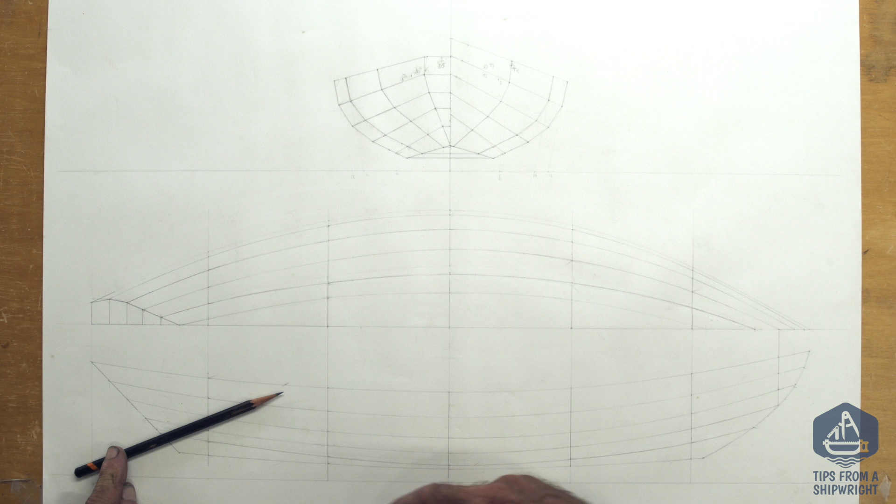Not only is it not over the lee side, because most of these boats sailed way better if you used an oar over the lee side, but it's a little tricky to reach it because you're trying to be on the windward side. So even though it sailed well, you got your weight in the wrong spot. So this oar right here, or this rudder, the tiller, is going to be amidships when you sail it, right in the middle of the boat.

It's going to be very easy to reach it, it's going to be easy to use it for some other purpose. You don't really have to stow it or put it away like you would a normal rudder. So it's a really nice feature, I think, right there.

It's also going to have in the boat a little well in it right here, just ahead of that right there. And that little well is going to be so that you can put a little tiny outboard motor or possibly an electric drive in it right in here. And your rowing seat is going to be up in here like this. So you got plenty of room between the rowing seat and your little outboard well like that. And like I said, when you want to row the boat, you just pull the oar out, you use it as one of the oars to row the boat with.

And then it's actually going to have another rowing seat up forward up here, and then a little dagger board trunk just after that seat. And it's going to have like an articulating dagger board in that well right there. So that's going to make the boat sail considerably better than it would.

It's going to have a very simple rig in it, and it's going to be actually stayed. I don't like the idea of putting an unstayed rig in a boat like this because I don't think they're structurally capable of holding one properly, you know. So what I do is I'm going to have a shrouded rig. It's going to have 2 shrouds and then a little head stay, and the whole rig comes down at once and rolls itself up, and you can stow it. So it's going to be pretty nice.

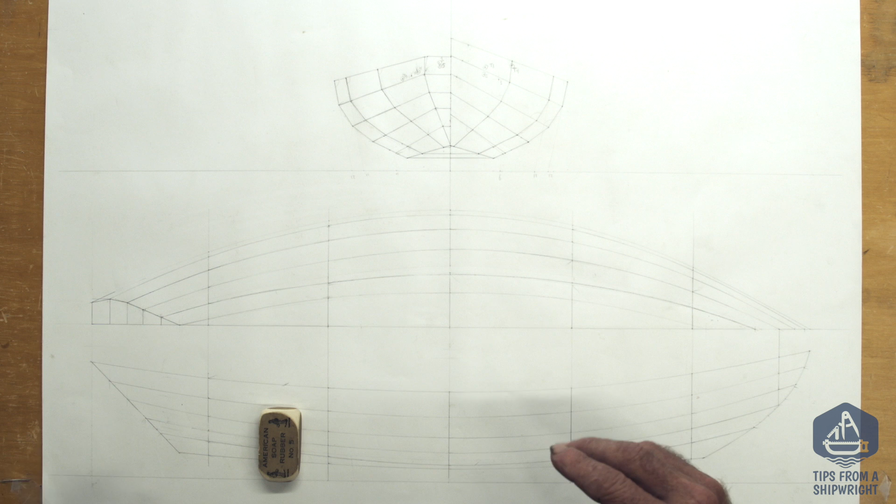The sport that I like doing with a boat like this is sailing in really lumpy water, real lumpy water. So I'm anxious to get the boat built so that I can get using the thing myself. Now I wanted to show you some other things here in the profile view.

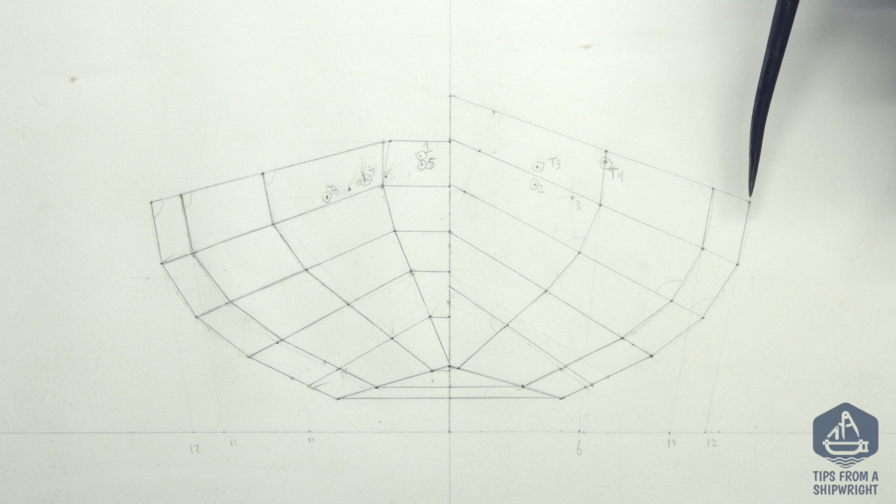Now, we generated some of these points before we started working on the profile view. Just by knowing how wide we wanted the boat, we put that into this view as well as in the half-breadth view. And then the height from the baseline, we also knew how high we wanted to make it, so we put that in this view and also in the profile view. So these are kind of predetermined points. We knew how high we wanted the stem to be.

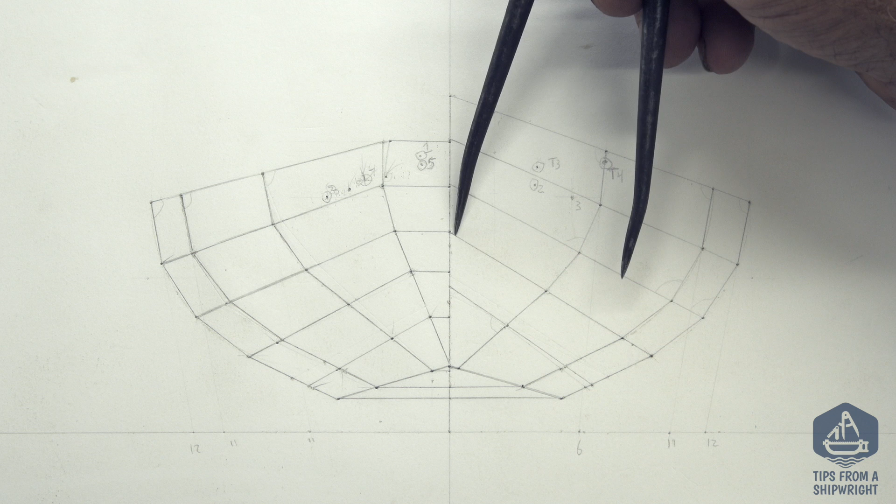The other thing we knew is how wide the bottom was going to be and where it terminated at the stem and how much rocker. So we drew these things in very much first. Then the next line we actually drew in was this line right here, because this line is the end of the dead rise right here. So we put this line in the other views first as well, and we also predetermined that we wanted it to have a 25-degree dead rise right in here, which it has, and then it shifts from there into planks that are within a radius.

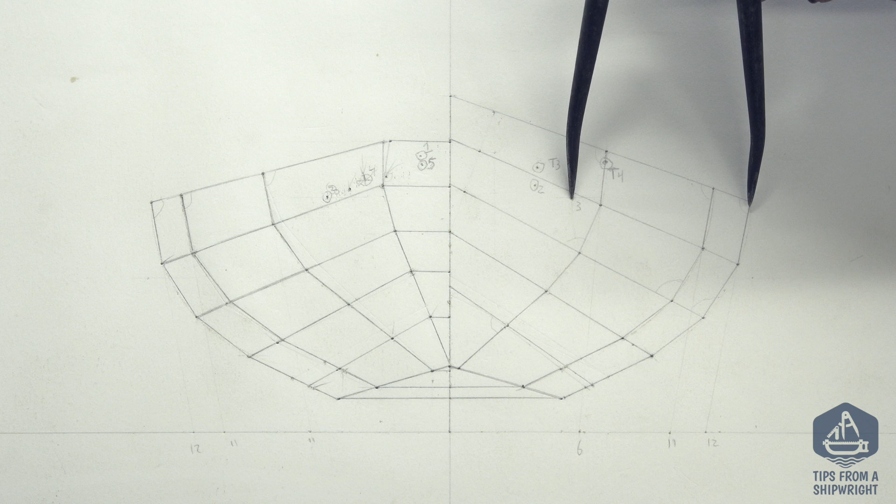So I'm going to show you this now. This is the center right here of number 3, which is the center frame in the boat. You see that distance right there? That's the same distance as it is right here. It's the same as here and the same as here. So that's number 3. I would say 3, 4 on that. It doesn't say 4 there, but it hits 4 points. So 3 planks are within a radius.

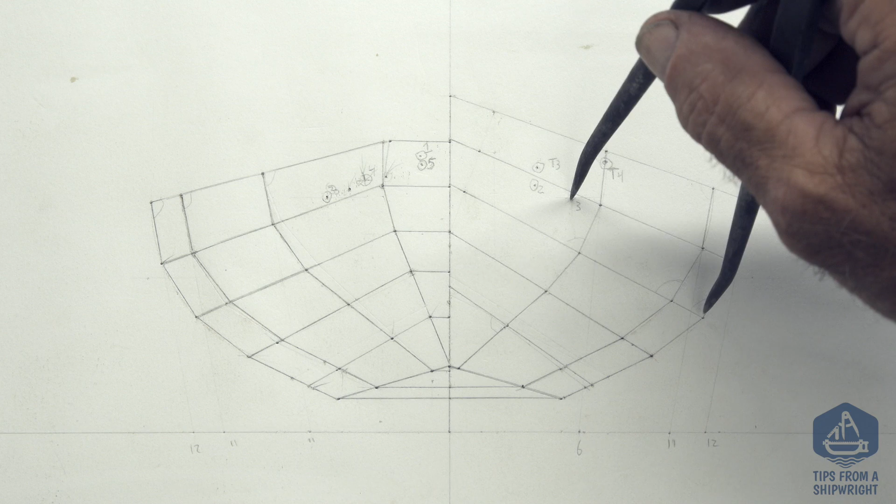Now let me swing down a little bit further. Let me center this up again. See, here they are hitting, and then it falls away. So the planks down below here, like this, you know, are outside of that radius. These are in dead rise outside the radius. These are all within the radius.

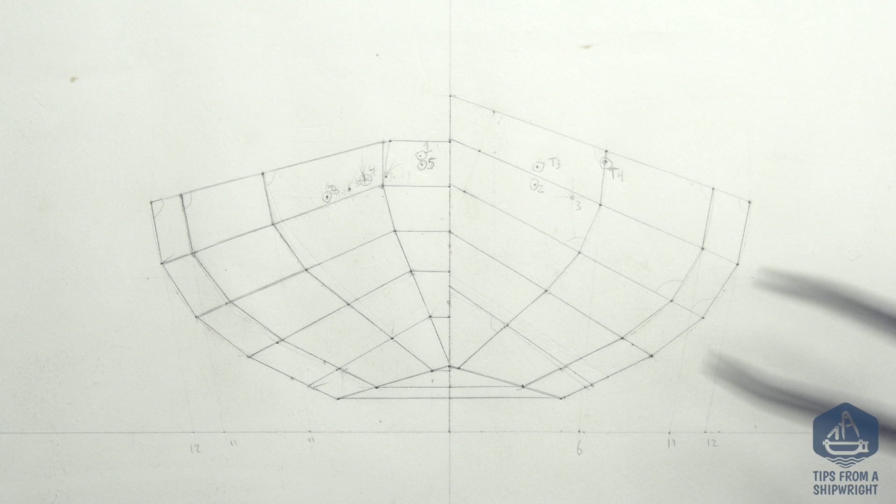So also, the other thing I'd like to show you is 1/3 of this distance right here is, if you divide this radius, and again up here, this is 1/3 of the distance right here where the radius runs out. So this is 2/3 of the distance, but it's divided in 3. So it's 2 parts of the distance, but we divided it in 3. So what we've done now is we divided this, right in this plan. We set the radius the way we wanted it. We divided this along the radius like this to get these all even like that.

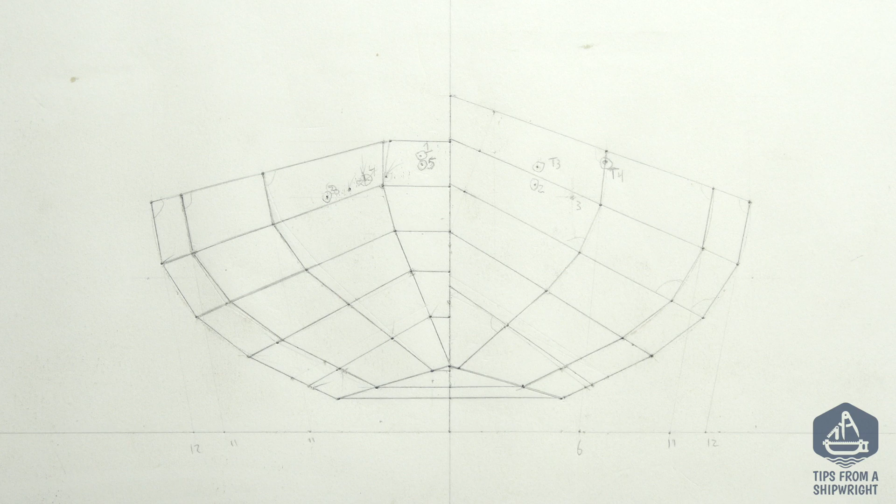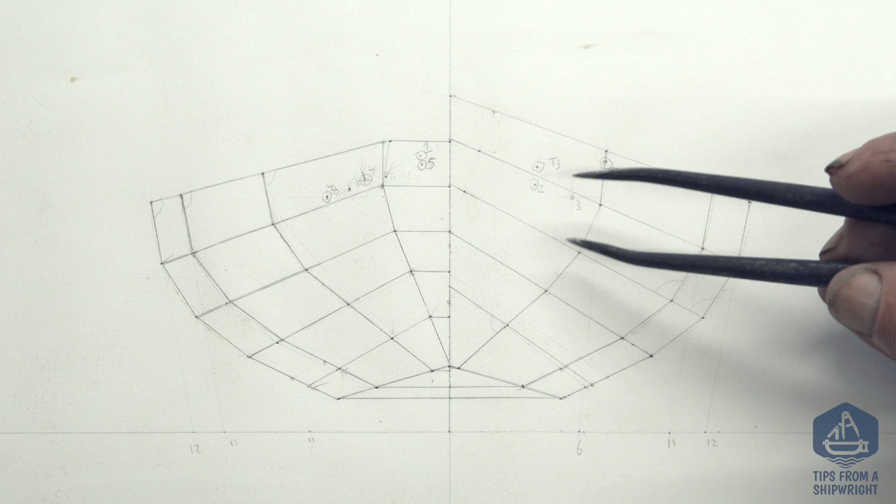And then forward we divided on this line right here, I divided that in 3 equal parts right there. And then I simply drew straight lines right through there. These would be the planking lines as viewed right from the very forward end of the boat. And they're straight in this view. They have no curvature whatsoever. It makes it much easier when you go to draw the lines in the other views because it's already straightened out, at least to some degree.

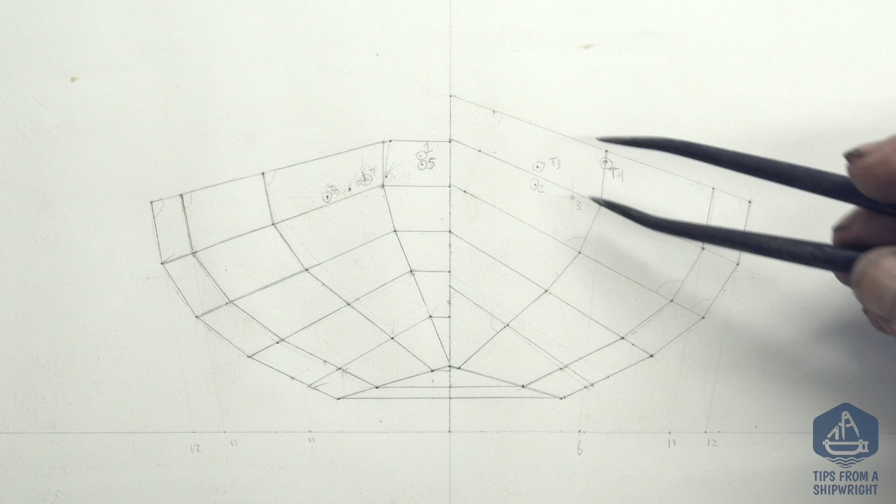And like I said, this boat is not lofted on water lines that go straight across, or buttock lines that go vertical, or some kind of a predetermined diagonal line. Sometimes a boat's got 2 or 3 diagonal lines within it. This boat is drawn on the planking lines. So these planking lines represent the inside of the boat, the very corners of the stations that you would build the boat around, or the dory frames that you would cut to this shape to bend the planking around.

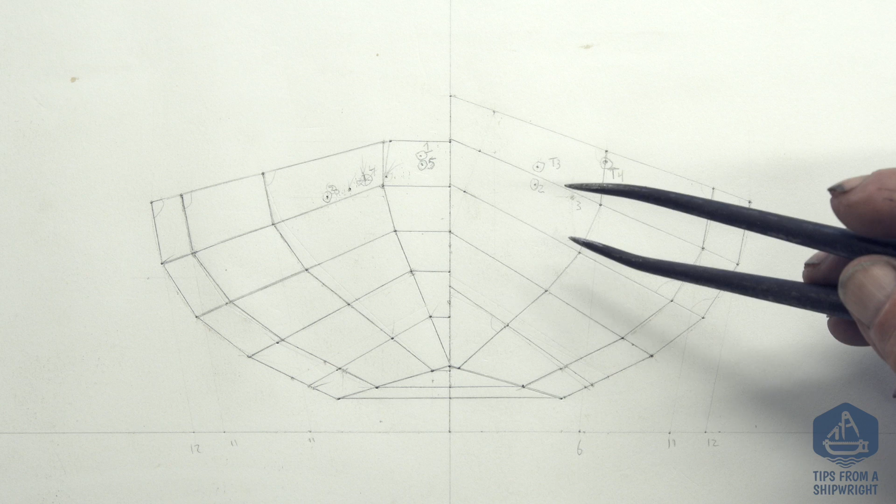Now we're going to make a mold to build it, and there's a few other things that are going to be a little bit different than a lot of dory building, but basically this is how you generate a 3-dimensional shape on a board the way I've done it right here with a very few measurements. You know, all I've done is use the board and transferred measurements from one view to the other until I was satisfied, and then you've come up with this shape.

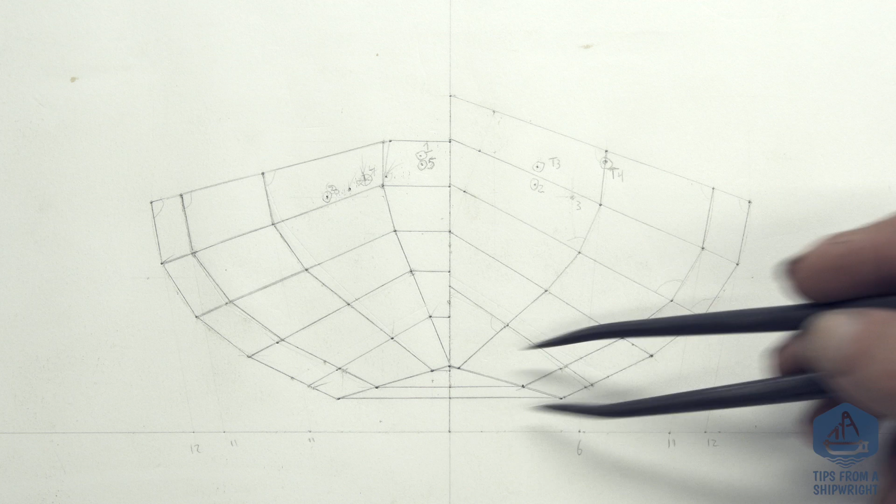And this is the most important view to me at this point, because the other views are fair, but I don't really need them. What I need is this view right here. This is the very center of the boat right here, the biggest frame section, and they taper down forward as you go. And then this is the center again over here, and they taper down aft, and this is the transom right here. So I'm going to set sections up like that to build the boat around, and we get started. That's how we get started right there. But before we do get started building, we're going to have to purchase the lumber.

Howdy, partner. Now, this is a great opportunity to go out and have a really good time. How are you this morning?

I'm out here with my friend Will Palaquin at his mill in Exeter, Rhode Island, and we're looking at Atlantic white cedar today.

All right, that one was like a banana. I see that one. That's an 8-foot log. Yeah. We got a little bit of a defect on that side, see it? I know how the other side would be.

Right now we're looking around the yard at all kinds of different things, some white pine logs, and discussing all kinds of stuff that we might do in the future. But we have a cedar log picked out already, and it's sitting right up on the mill right now. The only thing we haven't done is gotten together and looked at the log, because we're going to want to make some decisions about how we want to spin it and just exactly how we're going to saw it and get the best use out of it. This is important right now.

That's right. All right. But I want you to look it over good, and tell me if you want me to turn it one way or the other. Yeah, there is a little check on it. That's all right. If we work on it this way, we're going to be up here and down here with our flitches, okay? So you got the widest part on this side. So you think to keep it that way? Well, we got the crack right in the middle, okay? So you tell me what you know.

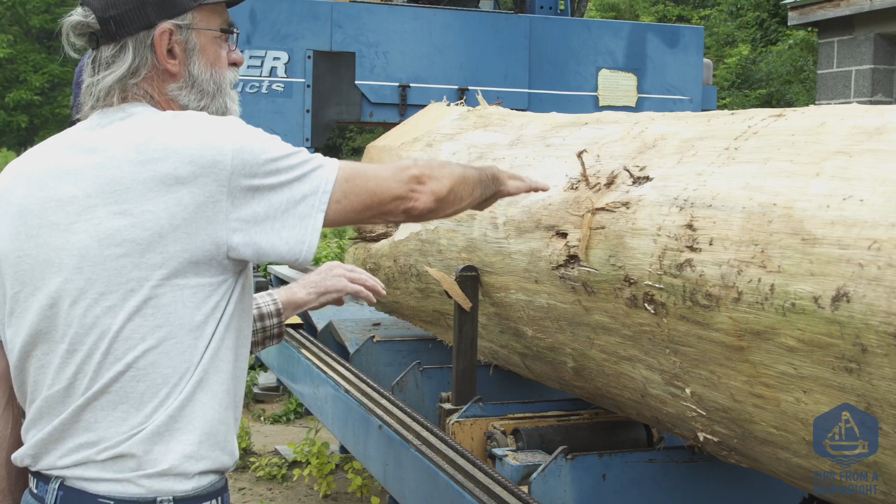Just like this. What he's doing right now is measuring up to the center of the tree, because I think he's going to block this end of it up, we're going to shim it up so that when we start sawing, it'll take wedges right off of it. He's got a certain way that he wants this to sit on the mill, and so we just flopped it up there for right now. Now we're going to block it up a little bit before we make the first couple of cuts.

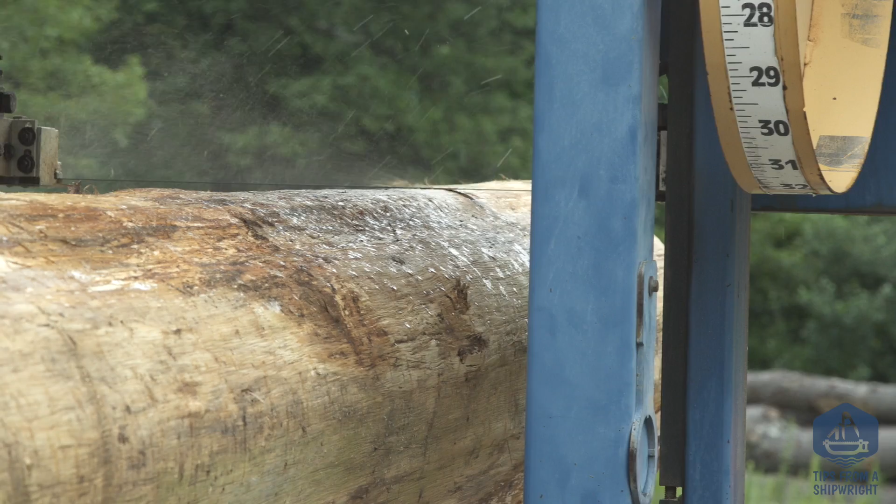So the purpose of these first 2 cuts is to get the cut parallel to that same side of the log that you're making the cut on. Basically what I buy from Will is Atlantic white cedar. This is the right material for planking a boat like this. Northern white cedar would be great, but I don't have a source for it, so this is the right stuff, and I've been purchasing and using lumber sawn out of this mill for quite some time now. I'm lucky to be able to purchase it at all, because northern white cedar is getting incredibly hard to purchase, so this stuff meets the bill.

I need to know whether you want a full 1 inch or 7/8. Well, let me just look here. This is all slab sawn right here, so just make that one 1 inch. So now we're going to make our first true cut. This is going to be a piece of lumber that we're going to keep. We're going to saw these pieces off just under 1 inch thick, because we don't have any reason for any of the lumber for the 2 boats we're going to build to be any thicker than that.

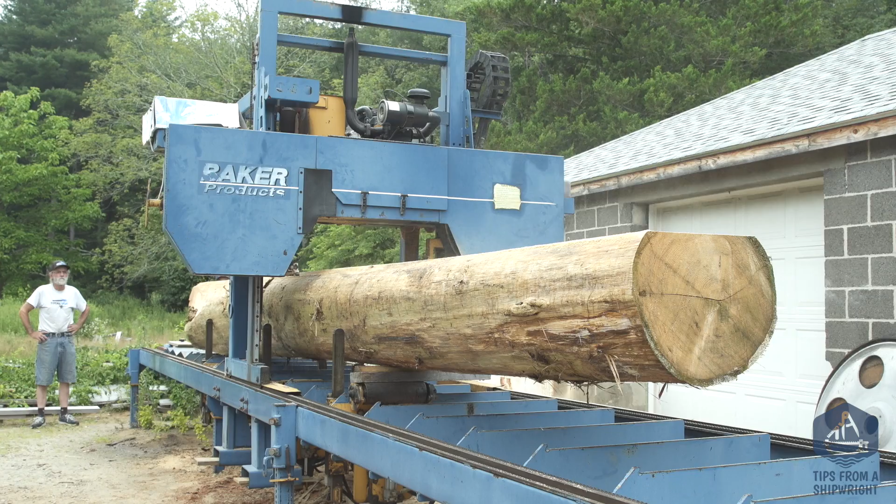So now we're about halfway down this cut, and we're proceeding pretty slowly because the cut is a little bit wider on one side than the other, and in the center of the log it doesn't have much tendency to wander, but over on one side of the log like this, it can wander if you go too fast. So the mill's controllable as far as how fast we push it along the cut. We can't really adjust the speed of the blade, but we can adjust the speed of the cut. Just under 22 feet.

Now look at the broadness of the cut right here. I'm going to climb up on top of the log and take a shingle and sweep all of this dust off, because the mill deposits all the dust right on top of the cut and you don't really get a good look at it. I don't want to be guessing. I'm going to climb up there and investigate really carefully. What we're looking for before we start running off pieces is to make sure we've got the log shimmed and rotated properly to get the maximum use and pieces out of this timber.

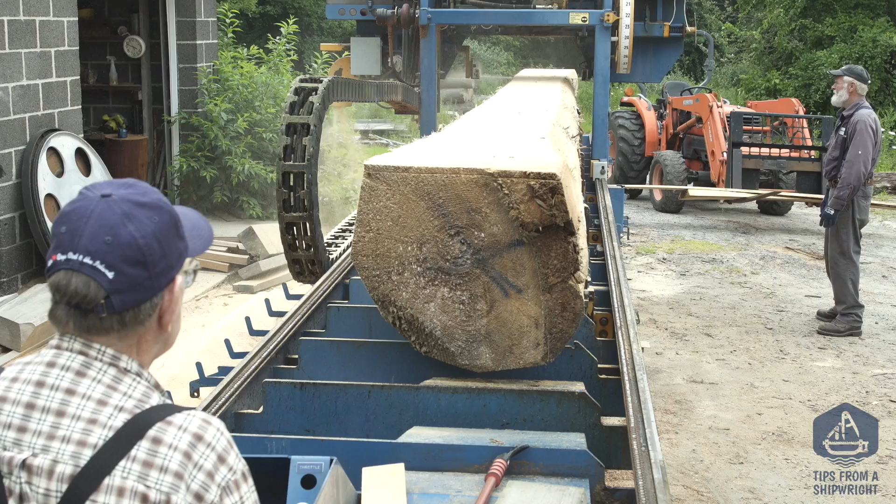Now we're cutting off the first pieces that are graded. That's why we've measured the length of it with the tape measure, and we've actually shortened up the measurement of the log a little bit. So I get a little bit of grace right there, and we're going to cut off pieces, and we're going to keep these pieces as we go right now.

Most of the first pieces that we cut off here are kind of slab sawn. They have some grain on the edges of the pieces that are like 45 degrees. And these are great pieces for some particular use, but I try to use more quartered pieces or more vertical grain pieces, and they start to develop as we get going down in the cuts right here.

And as soon as the blade reaches the other end of the log, Joe and I are able to just slide that piece of material off. But you can see they're not really, really light, even though it's lightweight wood. These are good sized pieces of wood right here. Very good sized pieces, 22 feet long, you know, by well over a foot width.

So we have to try to get as much of the sawdust off of it as we can, because there's no need of carrying the sawdust home with us. Will allows us to leave it out here if we can get it off the plank. So it's going to be a touch bigger.

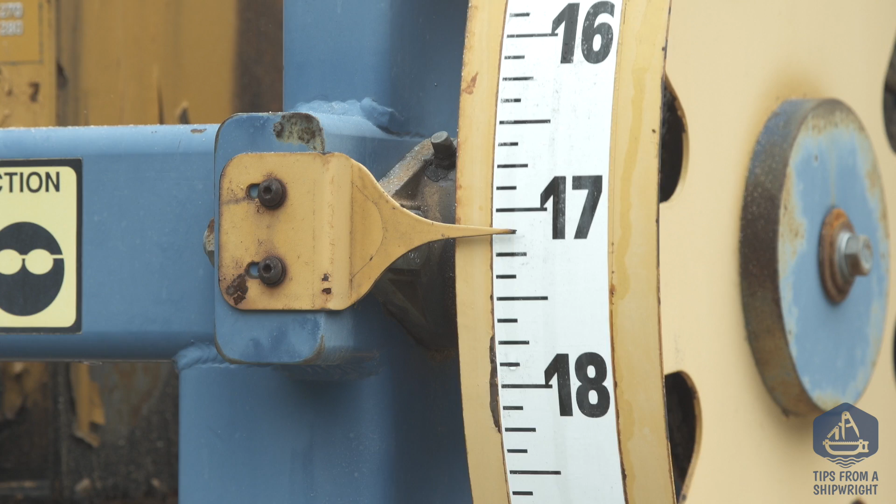And as we look at it, we'll notice that it's starting to get quartered on both sides. Now, it's not really quarter sawn, but it's what you call center cut. It's a very simple system of sawing a log like this. You're sawing parallel to one side, flipping the log over, and then parallel on the other side, and leaving a tapered piece in the middle of the log with what they call the pith, or some imperfections at the very, very center of the tree.

All right, we're just sawing off quite a few flitches here, and the boards are starting to come out very, very nice. This side of the log's got a little bit of a knot up in it in here, but it's pretty clear stuff. Now, a log like this and planks like this can be used for skiffs, because these are perfect skiff planks. They can also be used for dories. These are nice quarter sawn pieces on each side with the annual rings going right through it this way here.

So, I mean, this is nice wood right here, and the mill's doing a great job. Will's very careful on how he saws these things. He's got that mill operating nice and slowly, and it's very sharp. It's coming out nice and straight. And I think at this point, Will's probably going to decide on shimming the log a little bit differently, but I'll talk it over with Will before he makes another cut.

But here we are. These are Atlantic white cedar logs from Florida, and they're shipped up here and sawn up right here on the scene, and we get to saw it the way we want. This is great for me because I'm not at the mercy of somebody else's sawing. You know, Will and I get to talk things over and make the right decisions, and look at this. This is fantastic. So on we go.

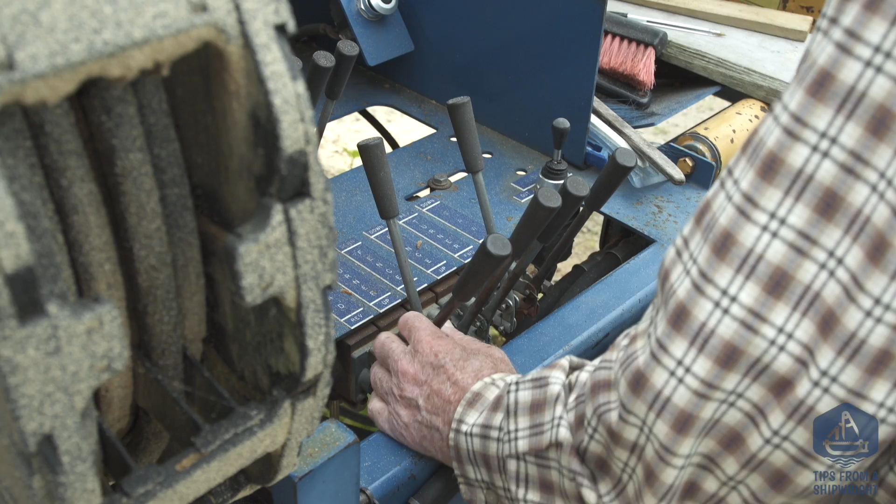Now, these next couple cuts will be the last couple cuts from this side, and they'll be the nicest material that we've sawn off yet, because it'll be the most quarter sawn or the most edge grained. What it'll have is like a center in it with quartered material on each side, and if I'm lucky, and by the looks of things I am, I'm going to be able to get 2 dory planks out of each one of these planks, one down each side. Look at the size of those things, with no slab sawn material in the boat whatsoever.

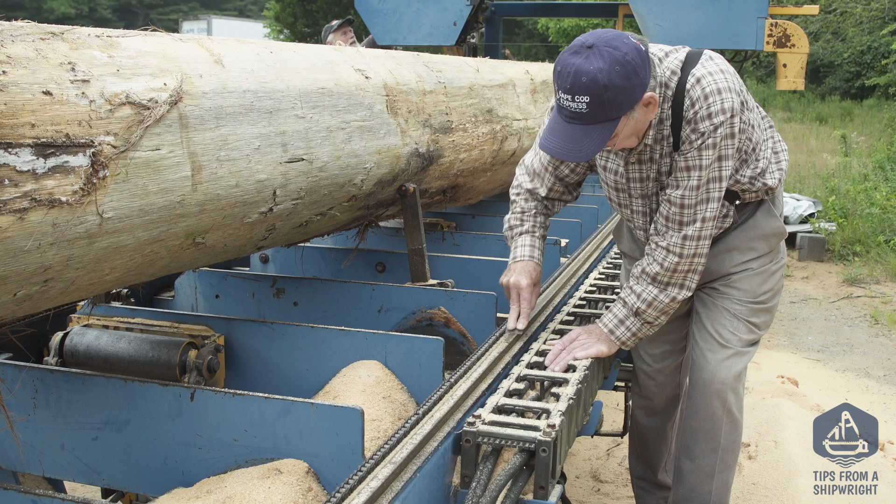You'll also notice that once in a while all of us step in and clean the ways of the railway system, because you can't allow it to build up with too much sawdust because it gets a little bit lumpy and your cuts don't come out quite as accurate. So we clean it off as often as we can.

Now it's a pretty important time because you're going to want to get the log shimmed properly again on the other side. It's not going to shim out exactly the way it did on the first side. You want to parallel this next cut to the other side of the log, and that way you just get the most amount of material that you can possibly get out of this piece.

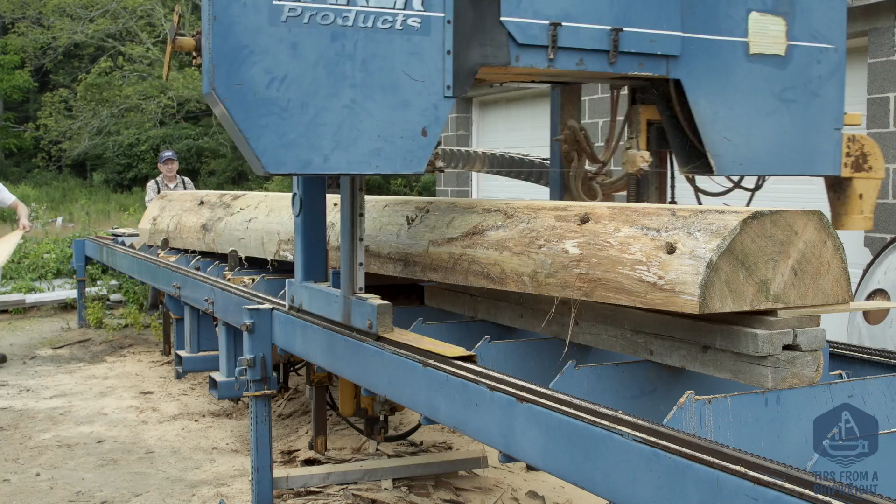Will's really cranking them out now on this side because we're all shimmed out exactly the way we want to be, and we can just make repetitive cuts, one right after another, and we don't have to make any more adjustments. The only thing we have to do now is determine how thick we're going to crank them off. So he looks at me and asks me if I want it to be an inch or an inch and a quarter or whatever it is, and I tell him, and he sets it up, and we take a quick peek at it to make sure it's coming out exactly right, and then run it right through.

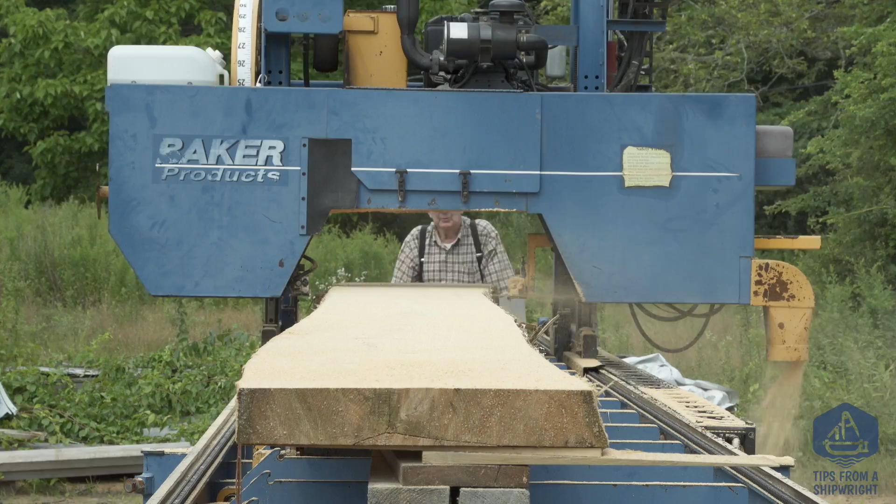But each time we do, we check the boards as they come off to see if they're taking any kind of a set, or the log is taking a set or anything like that, and really nothing has happened. As long as nothing happens to that log and it stays nice and stiff on there, the cuts are going to come out nice and parallel, and the pieces are going to come out exactly the way I want them to come out. Now, this was a pretty nice log because I'm going to get a quartered or an edge grain dory plank on each side of the center of each one of these cuts. Fantastic, really. So we're pretty happy so far, and we're whipping them right out, and we're getting towards the center of the log here.

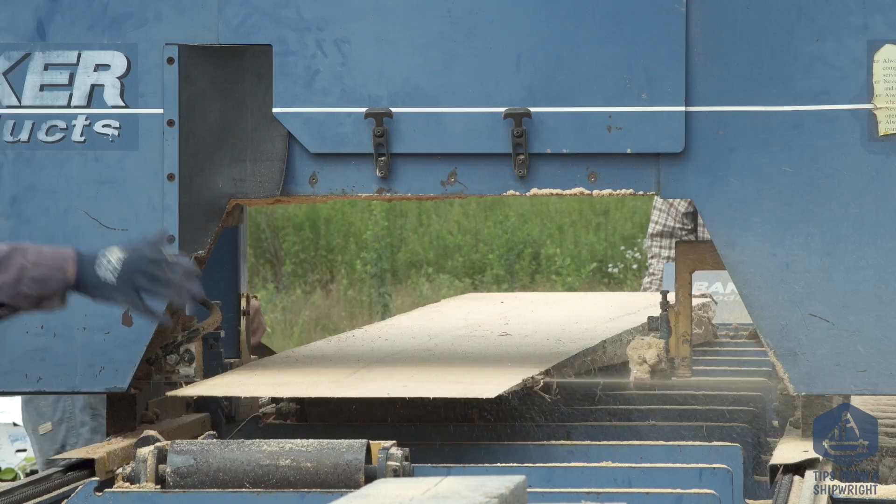You can see now as we do get a little bit closer to the center, sometimes we start to lose a little bit of the length of the log, and that's okay because we don't need every piece to be as long as the pieces that we're sawing off. So there's different things we can do with this lumber in the center. Some of it's tapered now, and like I say, we've left all the taper in this log in the center of the log rather than on the two sides, and we get the best material out of it that way.

So the last thing that Will's doing here is figuring the board footage in each piece, and he's being very, very fair about it. We're cutting a little bit off the length of some of the pieces and a little bit off the width, and you go to the center of the length of the piece and measure across it. That's how you get your width. You don't measure it at one end or the other. You measure it at the center. You multiply the figures together, add it all up, and that's what I pay for right there. Now, you could probably just measure the log itself right from the beginning and get a pretty accurate measurement of what's in it, but you never know for sure until it starts coming out of there.

Well, Will, I really want to thank you for sawing this log up for me. I mean, look at the thing. It came out beautiful, and you just did a nice, neat job of it. All the boards come out the same thickness one end to the other. I just love it. I get the most out of it when you saw, above and beyond anyone else, so I'm really happy. Well, thank you very much. We try to do a good job. Well, you've done it once again, and I'm going to be back for some more in no time flat.

And we're going to saw that big oak log up there for quartered pieces for that transom. So we'll be back in a day or two. Yeah, you wanted those 2 1/4 inches, right? 2 1/4 inches. That's right. Don't sell those logs. You know those big logs down there? Is there anything in those logs that's any good? Oh yeah, he says.

This is the log that I picked, right? That's the one you picked. There's another pretty one down there, but basically only half of it's good. One side of it. Yeah, I'd say one side of it. Well, that's okay, I'm going to study this stuff beyond your wildest dreams and figure out what to do with it. Dory planking is curved, like I said. The skiff plank is nice and straight, so I have to pick it over and put it in different places, and oh my God, I couldn't be happier.